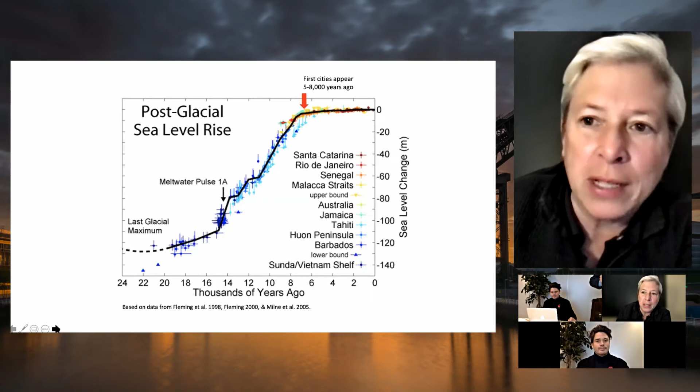So I just want to remind everyone, we didn't have cities during the last fast periods of sea level rise. This chart shows the last 24,000 years. I originally came to urban design from geology. So as a person who studied glaciers, I never thought I would connect the two. And here I am, of course, now having to watch the glacial literature all the time. But we invented cities during a period of very slow sea level rise. So we're going to have to reinvent.

Today, actual sea level rise is tracking a path to about 0.12 meters of sea level rise by 2030. So that's on the middle path out of the possible concentration pathways. But it's important to recognize that it's not just a projection, it is happening.

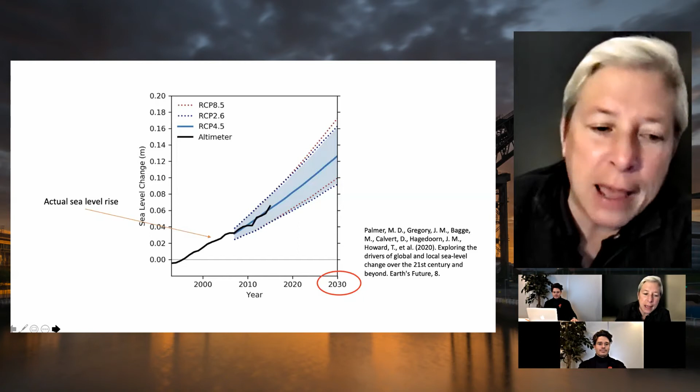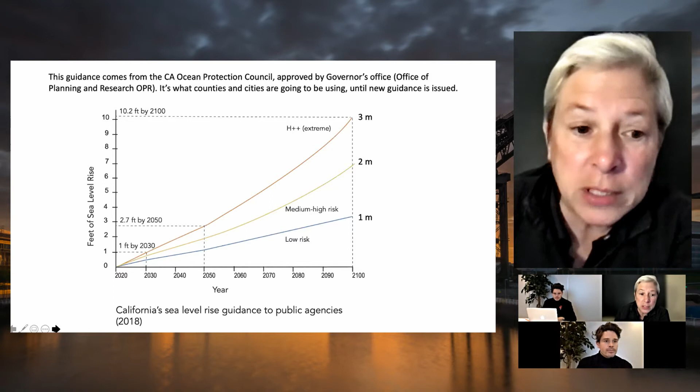Here in California, the state government has given us guidance in public agencies to consider 1 meter of sea level rise for low-cost, non-permanent investments, to consider 2 meters of sea level rise for high-cost permanent investments, and for truly expensive things like new highways and new sewage treatment facilities or major investments in old ones, we should be considering 3 meters of sea level rise. So that's been helpful, although it's considered very challenging by public agencies here. Just wanted to give you that context.

And then at least one take on what the context is in the United Kingdom and Ireland and the Northwestern European coast. I would think these are the areas in red that would benefit the most from the kinds of ideas I'll be talking about.

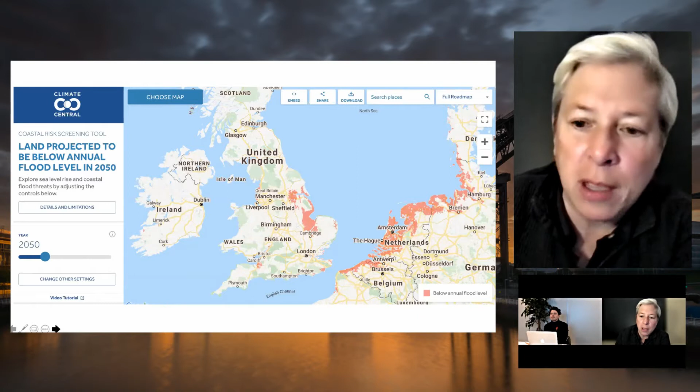The Dutch have known for a long time that sea level is rising, and that not only is sea level rising, but local rain intensity is increasing, river flooding is increasing because of rain intensity upstream. And most importantly for our conversation, groundwater is also rising. And because they have an extensive national network of pumps, they deal with that by mechanical pumping. The rest of the world doesn't have mechanical pumping in an extensive system in cities.

And so what we're looking at in the future is that as sea level rises, groundwater near the coast will also rise. And we expect that it will inundate more hectares of land than the lateral movement of seawater alone. And even if we build structures at the shoreline to block the waves of the sea, for example, the groundwater could still rise and inundate those urban areas.

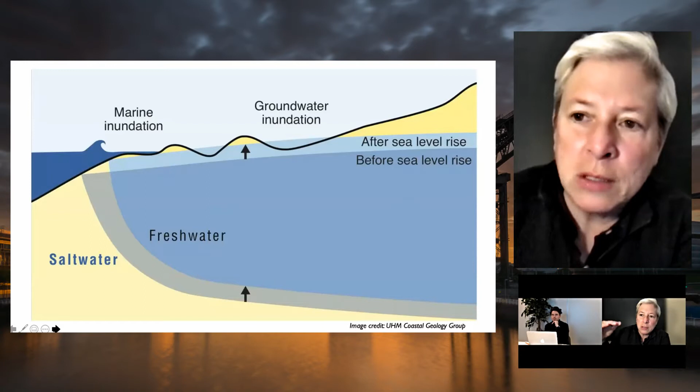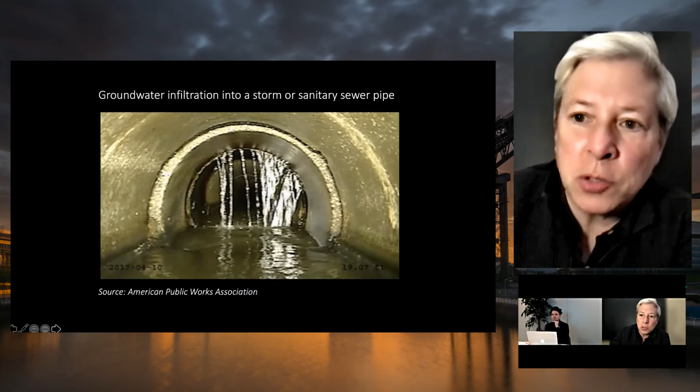When it rises, groundwater infiltrates storm and sanitary pipes and takes away their capacity, takes away their functional value. People can no longer flush toilets or drain districts of stormwater. We see this already happening here in the Bay Area. We see maintenance holes where water comes up at high tide. We've seen this in New York, in Miami. The systems we designed to take rainwater away are the primary pathway for tidal water to come up into the cities and cause spot flooding at this point.

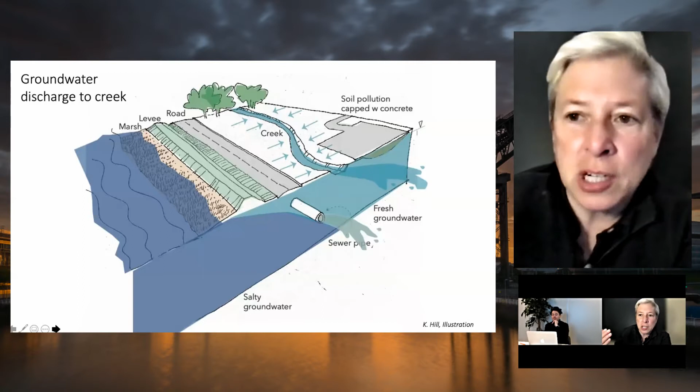What happens in this quick illustration of how this works is the seawater on the left, the darker blue, rises. And as that happens, the groundwater near the coast rises pretty much at the same amount within a kilometer or so of the coast. And it won't be 1-to-1 farther in, but it does still rise farther inland as well. And it discharges. It discharges to surface streams, it discharges to cracked pipes, and eventually it floods.

And that flooding will, as I said, be a kind of toxic soup if our toxic soils are inundated by rising groundwater. And it will occur even though we may have levees on the coast, because the water is coming up from below the levees. It's like the toe of the ocean is pushing up the pillow of fresh groundwater. And what a disappointment it's going to be to people who expend billions of dollars to build levees and then discover that the area behind them could flood anyway.

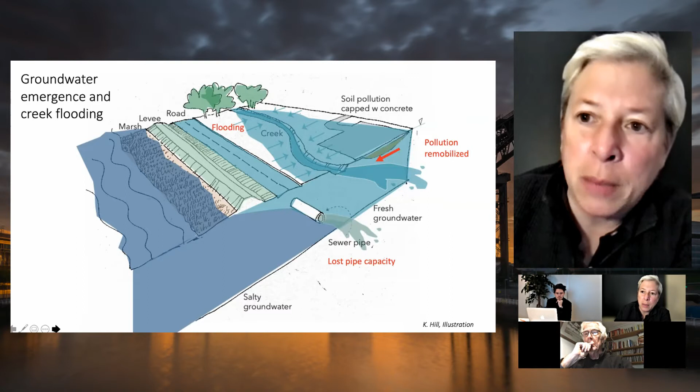That's what we're seeing. But what's happening underground is even more damaging, because both saltwater groundwater and freshwater groundwater could be corroding building foundations. And as we saw with the condominium collapse in Florida over the last summer, that's going to have structural implications, and conventional buildings are going to fail.

So even though there's a kind of typology for adaptation designs that are at the coast itself, everything from movable gates in Rotterdam or London to New Orleans, fixed flood walls, to dikes and canals, and the new era of nature-based strategies like the sand engine or like wetlands that we're using here in the Bay Area. The trick is, what will the urban districts be like on the inside? What is the relationship going to be like?

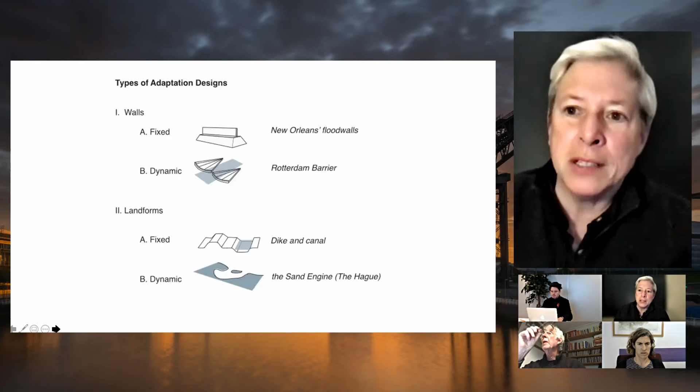Pairing a wine with dinner, pairing a coastal strategy, a structural strategy with an urban district, because the nature-based strategies are going to not be as predictable. We're going to need urban districts on the inside of strategies like the sand engine or a wetland edge, tidal marshes, to be more robust.

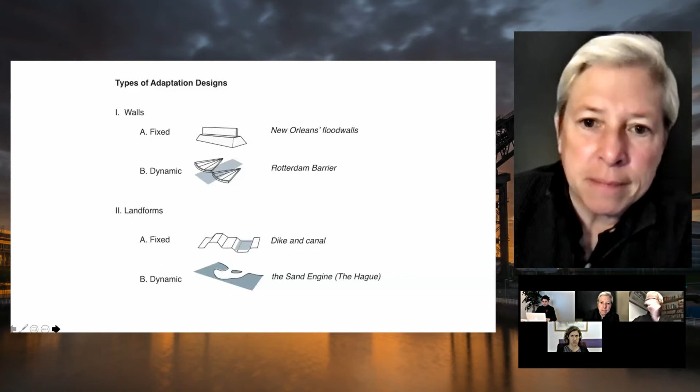And it's a change from about a 10 meters tall and 100 meters wide original dike, to what they've done now, where they've not made it taller, but made it very much wider. Now it's something like 300 meters wide, and it's terraced on the back, so that if the river does ever overtop this structure, the water would land on a terrace that's canted back towards the river and provide time as floodwater pools on this terrace before it spills over and pools on the next level.

So it's giving people more time to evacuate, and it's so big, it's like a topographic ridge. It can't fail when it's overtopped. And that's something that we're going to have to learn from in the rest of the world. It's also an example that's stood the test of seismic events, but it requires a lot of sand and gravel to build. I'll say more about that in a little bit, how having different materials available to you in particular regions gives you different options. And they have a lot of sand and gravel available in Japan from steep rivers.

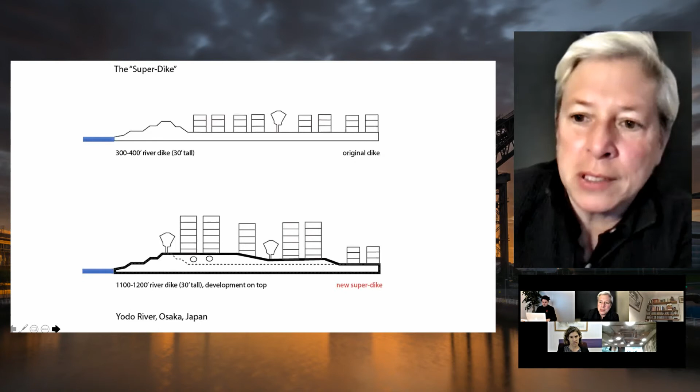In Germany, the HafenCity is a classic case of floodable development now. It was a warehouse district at their port with the natural levee behind it. And this is a development that was built with a hardened first story, so flooding can occur without causing any damage to residential areas. It's what we'd call a tiered or terraced version of floodable development, where, like the Super-Dike, it's built up. And what's inside that hardened first story is parking garages or just compacted earth.

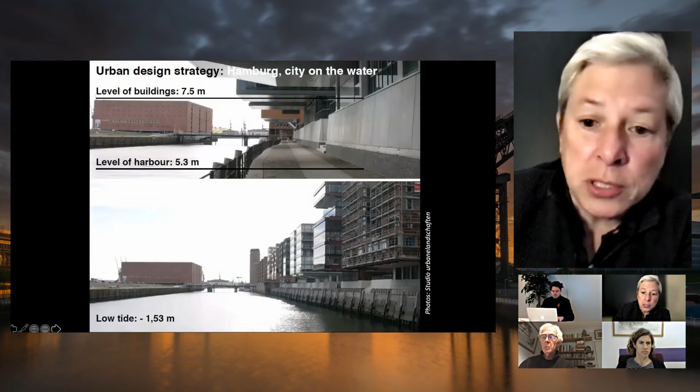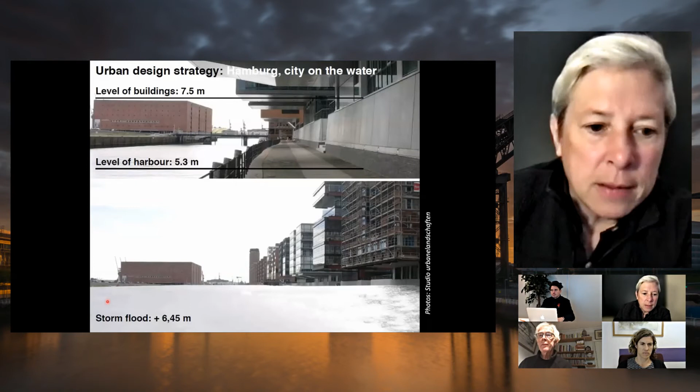Here's a view from the Promenade here. I'm sure many of you have been here, but it's worth seeing it as a flood event might occur. And if you watch the lower image, I'll show where the water goes. At low tide, it's right on the face of that conventional seawall. But in a storm flood, it's on the hardened face of the buildings. In the upper image, that would be right here. So it's set up to flood, to allow that flooding to occur on the lower terraces.

And then on the interior of what's essentially a sort of finger pattern of wharves, the interior is higher than the exterior, and there's a second story system of circulation to allow people to stay and get around, and even a small ambulance can get around in a flood condition. So it's floodable and no one has to evacuate.

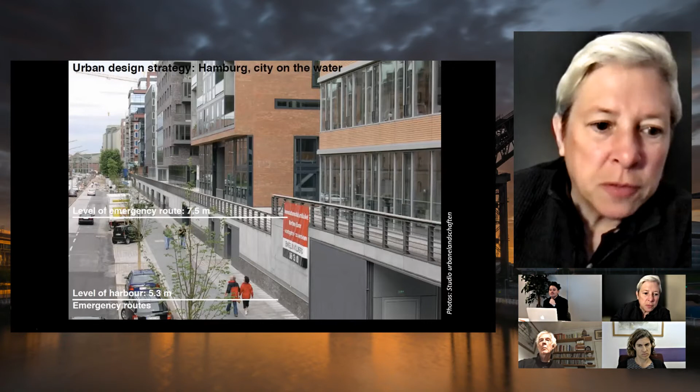And during an actual flood, people put their cars into waterproof parking garages and then can take their families down to the edge of the flooding and see it, which allows people to use their natural intelligence to understand what's happening in the world around them in a way that living behind flood walls, where you can't see how the water is rising and falling, doesn't let you learn. So what's wonderful about this is that families come down and kids grow up understanding that that flood level is rising, and that eventually they'll have to think about how to raise the terraces even higher.

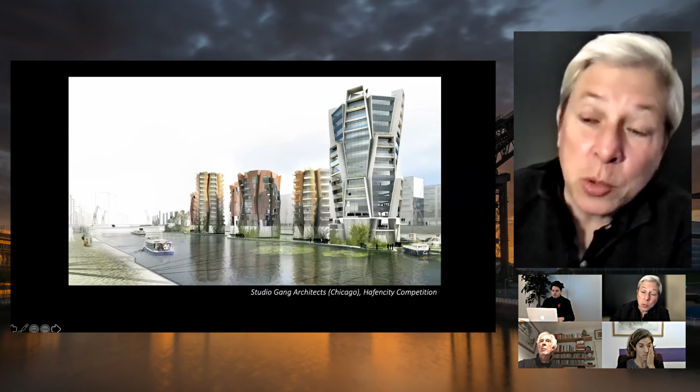And the future of development in the Hafencity is likely to be mid-rise buildings with their foundations in the water, in the canals. And that's something that can be done in landscapes where there isn't seismic activity, there are no earthquakes, but it would be much more difficult and more expensive to do where there are earthquakes. So it's a good strategy for most of Europe and other parts of the world where there aren't earthquakes, but not so good for parts of the world where there are earthquakes.

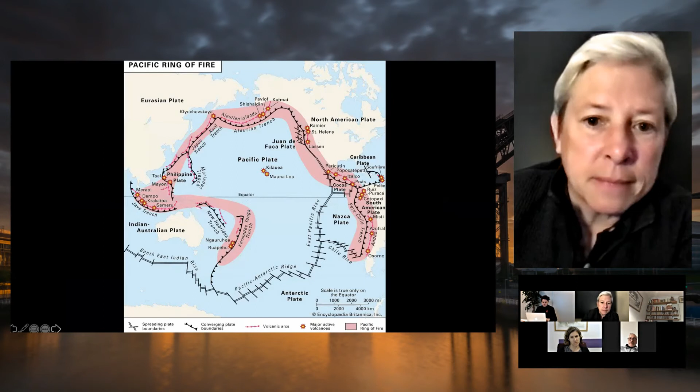So here in the Pacific Rim, we have a different situation. All of these countries are affected by seismic activity, all of these coastlines. So some of the Dutch and German solutions don't work for us. Here in the San Francisco Bay Area, the pink-purple lines show our earthquake fault lines, and you can see they surround this area at the edge of the bay. So we have to choose strategies that will work with an earthquake.

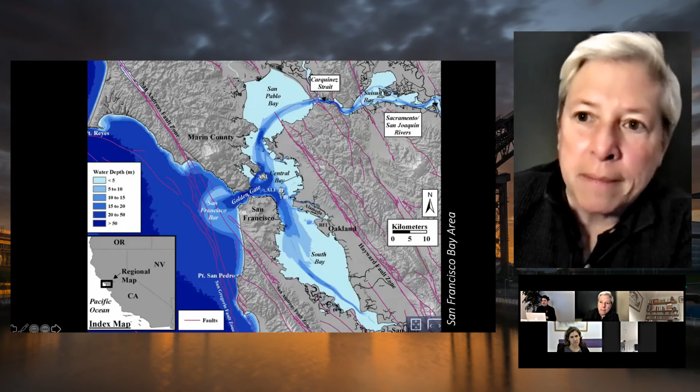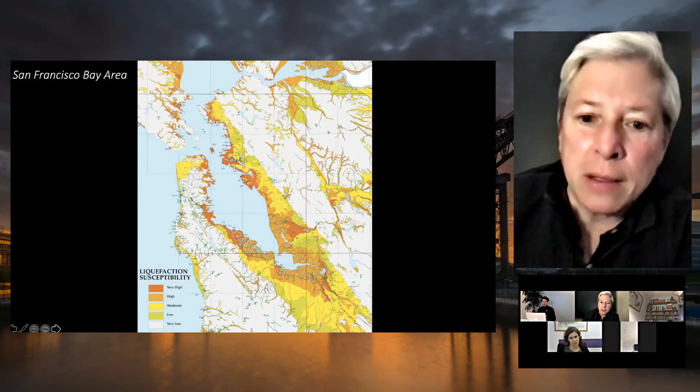The other aspect of the earthquake is when you have urban fill material that was put on top of old wetland soils, you get extreme shaking during an earthquake event, and the material that's been dumped onto the old wetland soils can behave like a liquid. That's called liquefaction. And you can see that most of the Bay Area is susceptible to liquefaction and extreme shaking.

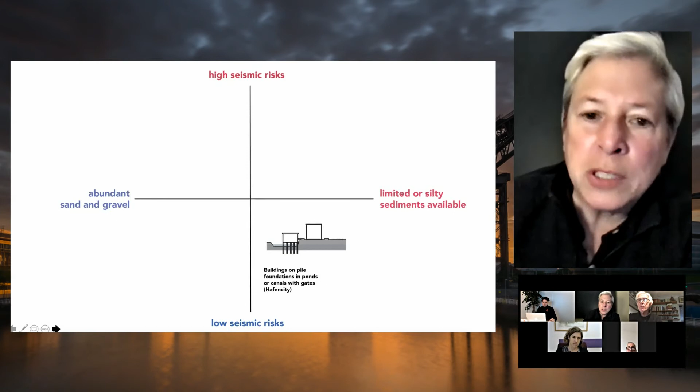So what would an adaptive urban district look like in a kind of typology that would help us understand where we can do what? I think of it as if you have abundant sand and gravel or limited sand and gravel, you've got very different conditions. And if you've got no seismic risk or very low or high seismic risk, you have different conditions. So I think of the Hafencity or the Hamburg Harbor City example as being a condition that you could build if you have limited sediment and you have low or non-existent seismic activity.

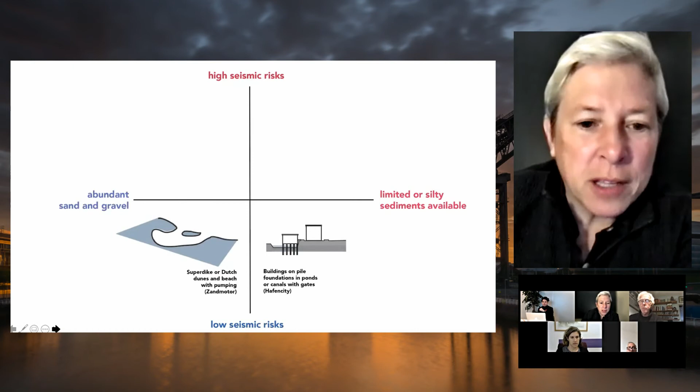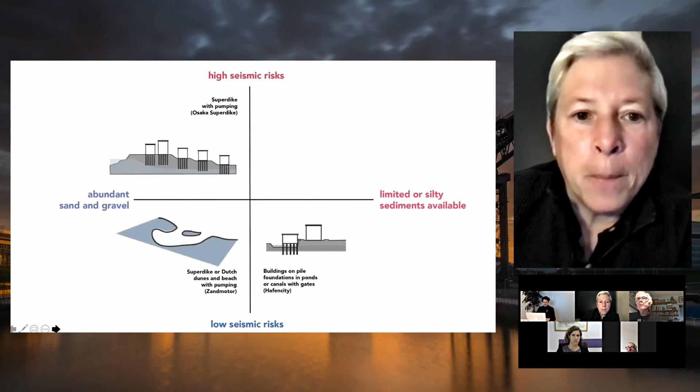I think of the Dutch Superdike, which I'm not showing images of, but it's a very well-known nature-based strategy now where they moved 21 million cubic meters of sand. They have abundant sand to try to protect their coast. That's something you can do, obviously, if you have abundant sand. And then the Superdike in Osaka was built, again, with abundant sand and gravel, and it works for a high seismic activity region. It's very stable because of the way the materials have been stacked geotechnically. But it wouldn't work in a situation like the San Francisco Bay where we don't have much sand and gravel.

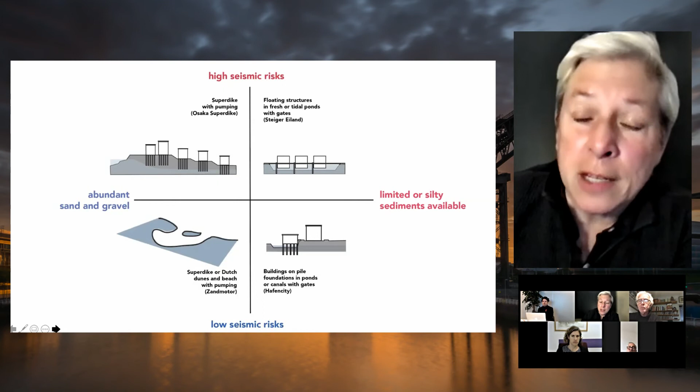So what might work for us out of those different types I showed is something more like the Steigereiland floating units strategy. So that's what we've begun to look at. It's been permitted in the city of San Jose, which is the largest city now in the San Francisco region.

So Pacific Rim strategies that help us address seismic activity, biodiversity, maintain high water quality, and think about rising groundwater are the ones we're looking for. And in 2016, San Francisco regional residents voted to tax themselves to build 40,000 hectares of tidal marshes to adapt to sea level rise in one of the first regional votes that tested whether or not people are ready to start paying for this kind of adaptation.

We've been talking about using that strategy of tidal marshes with a strategy of artificial ponds. So what we're talking about is what my former colleague, Richard Haag, described as the essence of landscape architecture. We're going to dig a hole and make a mound. So we're going to dig ponds, excavate artificial ponds where the land is now dry-ish, take that sediment where it's clean and use it to build a wedge of tidal marsh on the bay side. So that's essentially the strategy.

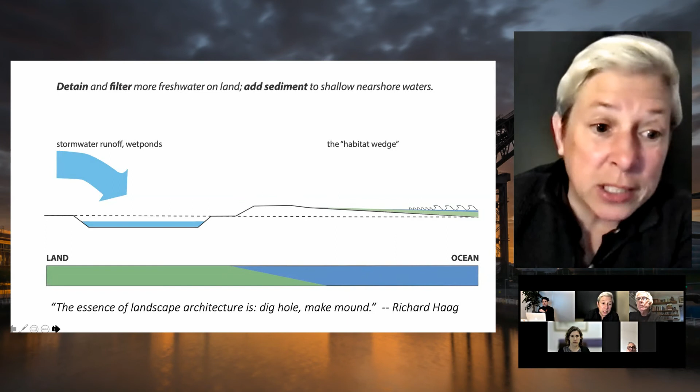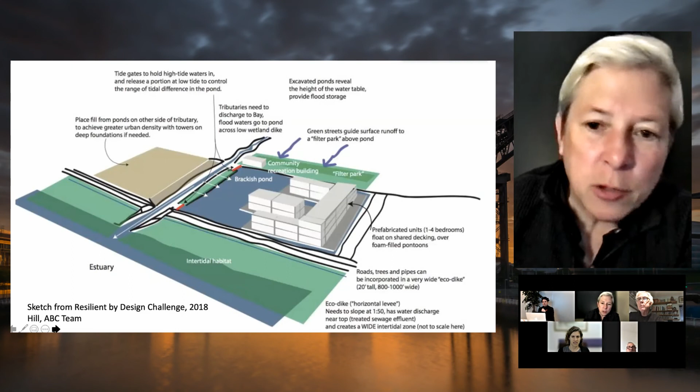And we're designing ideas for floating units that are on shared decking instead of every tub being on its own bottom, like the Steigereiland example, because in that kind of an approach, you don't have to worry about which wall the piano is on and which wall the bookcase is on. Everyone shares the same decking inside one of these artificial ponds, and tide gates allow you to control how much of the tide enters and leaves each pond.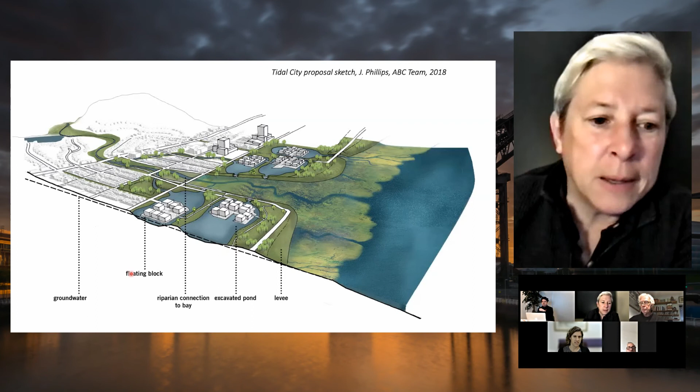And excavated material is used to add to a big habitat wedge on the bay side, because we can't proceed with this adaptation without continuing to build our tidal marshes, because we have very strict federal laws about biodiversity. So we have to do something to preserve that biodiversity as we grow, and it serves us as a way to reduce wave energy, in addition to providing support for biodiversity.

So this was the drawing we used in a competition that became, I think, very interesting to people in the Bay Area. And it shows 3-story prefabricated units on shared decking with pontoons, probably not large enough. We're early in our studies of this now. And that's the kind of strategy we're looking at that would allow us to adapt to living with a higher groundwater condition. We're essentially expressing the groundwater condition in these ponds, managing water quality using the landscape around the ponds, and then living in the ponds.

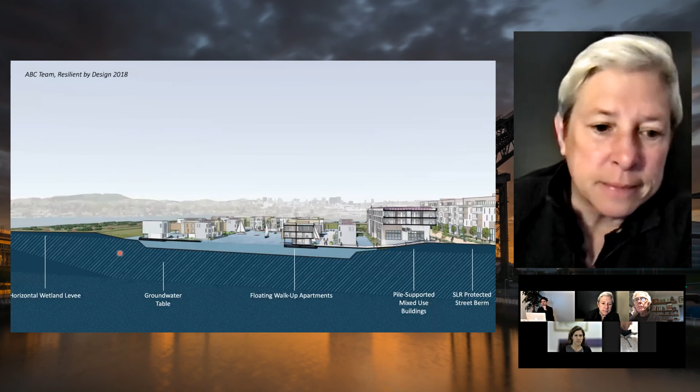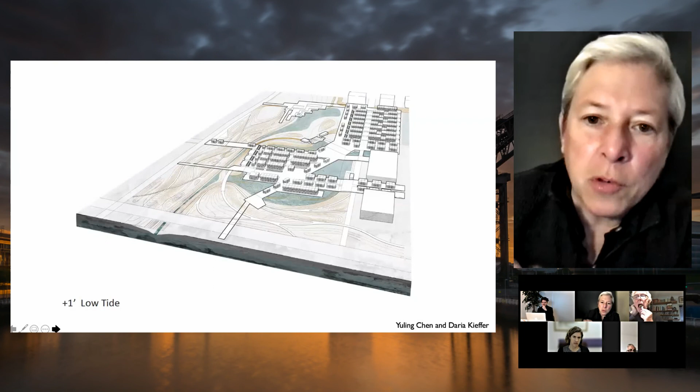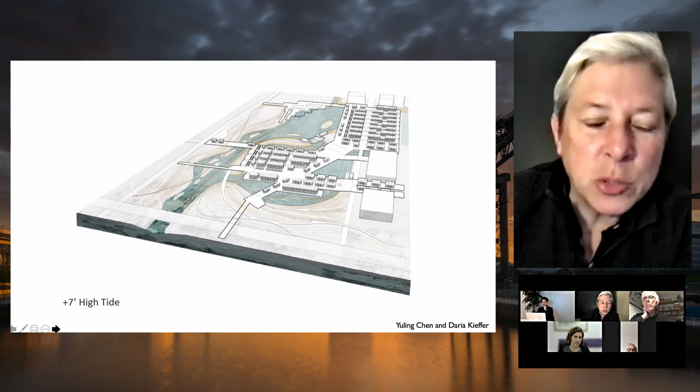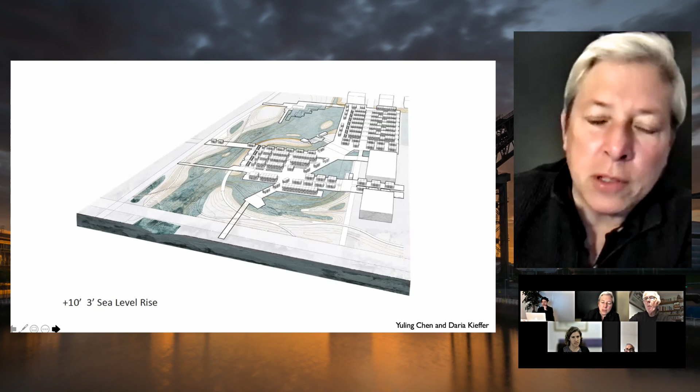And this is an example of one of those, it's a student exploration, but it's a useful one. It's showing shared decking, stacked units, and then a tidal condition around it. And I'll show you how it goes from low tide to high tide. You can see a landform of levees surrounding the artificial pond. And then at high tide, you can see that those landscapes are still intact. But as we add sea level rise to it, with 3 feet of sea level rise, it's pretty reasonable. I still feel like those landforms could do their work of supporting that tidal city.

But at 6 feet of sea level rise, we think that the landscapes wouldn't perform. The levees would be subject to failure during an earthquake event. And while nobody would lose their life, all that would happen is this decking would drop to the bottom on top of the pontoons, and things might be canted, but nobody would die.

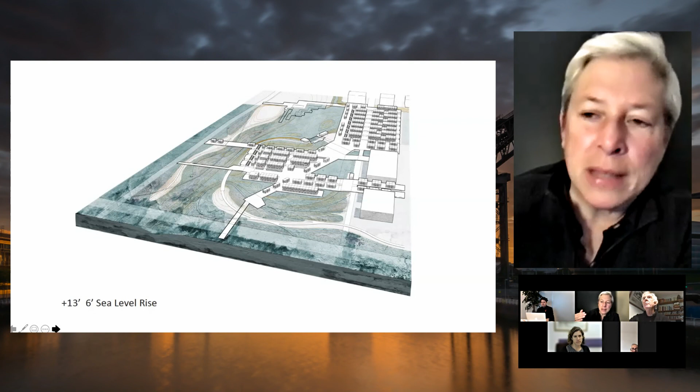We think that we would have to move this system of tidal cities inland, possibly with every meter or so of sea level rise. But what it does is gives investment in housing development certainty for a period of time. And that's what we need. We need to know that we can build housing that would be safe and secure for a period of time.

And it's a strategy that we think could scale if people have more labor, but less money for construction. There would be ways to do this because all traditional societies had some version of floating architecture that developed near the coast. So these are actually quite old ideas, and the technology is something that everyone can access at different scales of labor and capital investment. And I'll leave you with that thought.